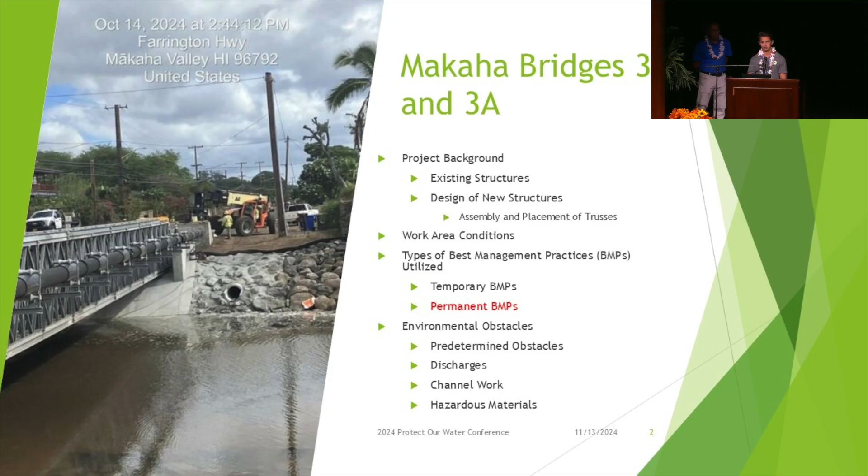Aloha, or back in Illinois, it'd be hello. So

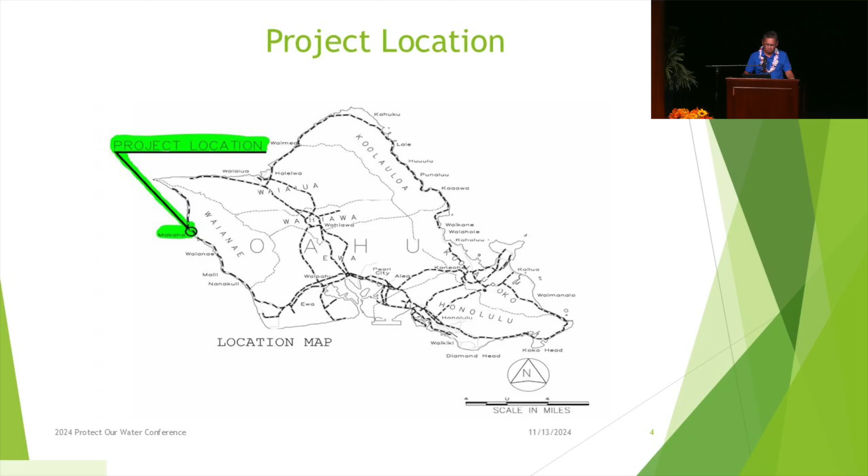The location of the project is on the very far west end of Oahu in Makaha, and it's like the furthest outpost of the island. It's pretty nice. The scenery is great. And I would like to show you a video of the project from an aerial point of view. As you can see, we're heading towards Kaena Point. And the first bridge below right there is Bridge 3. And we're heading north. And then to the right is Kili Drive.

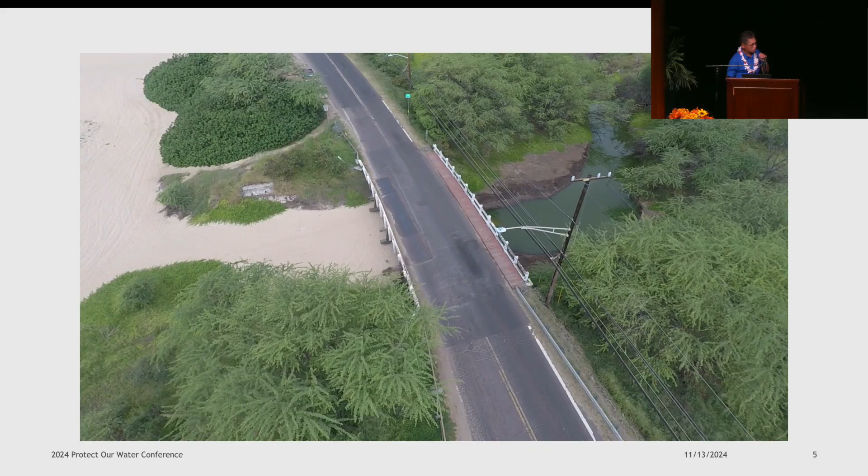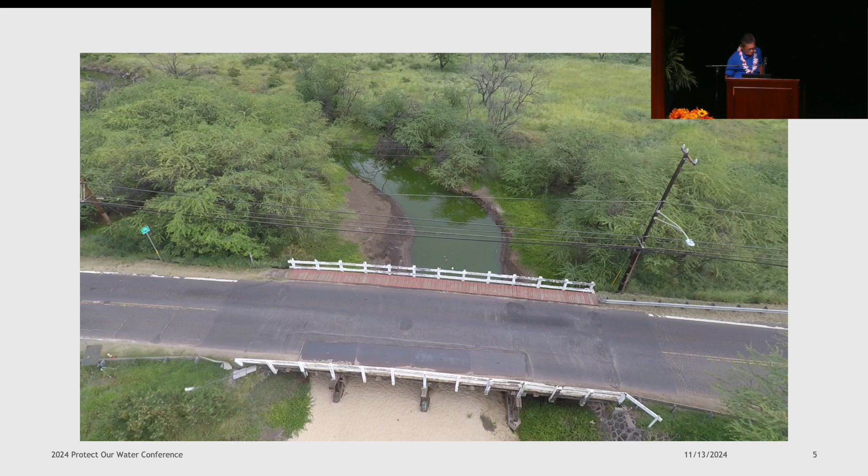And then as we move forward, you can see Bridge 3A up there. And probably another 500 feet past that is the limits of the project. And I think the drone will go down and show you the cross section. As you can see, these are relatively old bridges. Everything's made out of wood.

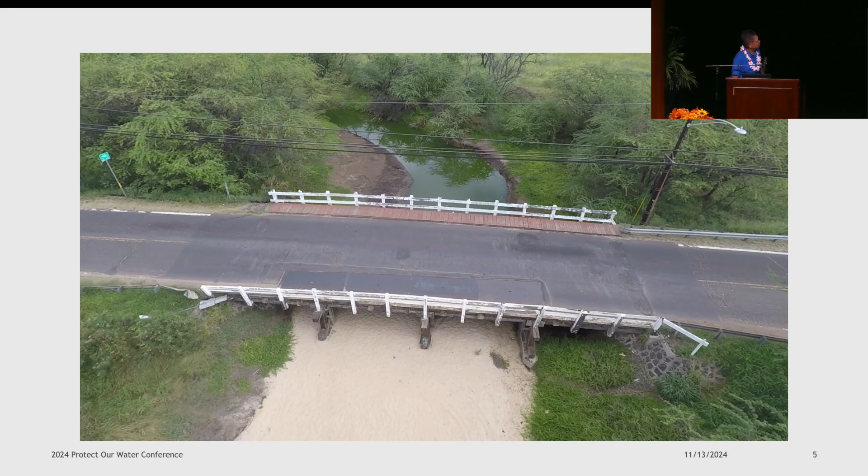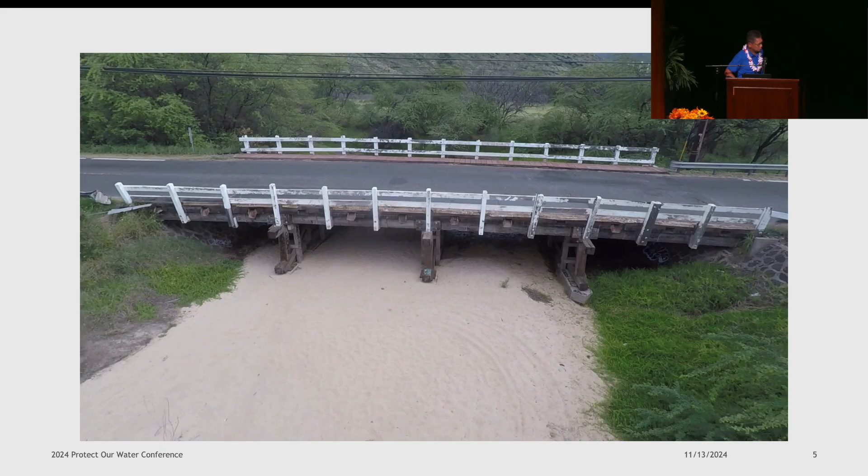Okay, just want a little brief background on the bridges. Bridge 3 has 3 spans. Bridge 3A has 4. And the superstructure is comprised of wood plank deck on wood beams. And the substructure is composed of concrete abutments and wood cap and columns for the piers.

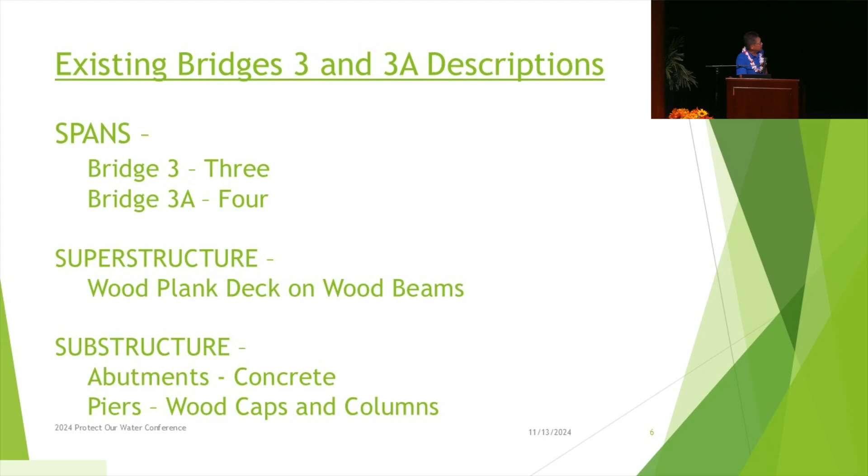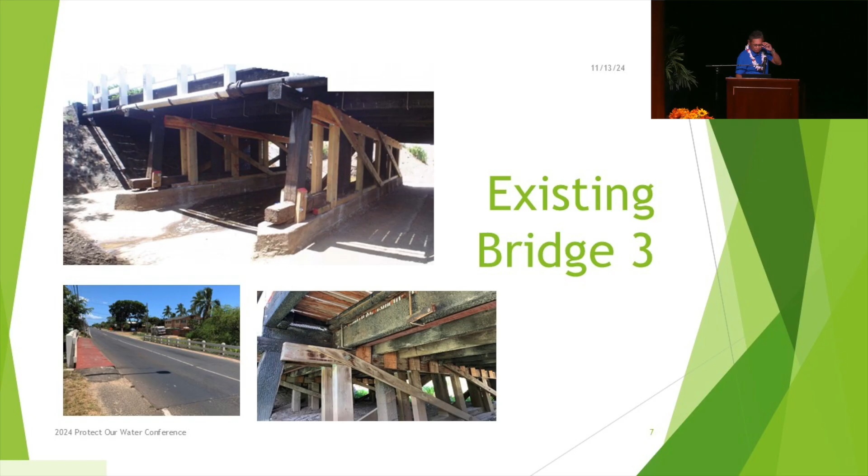So moving on, you could see that we had to strengthen the piers below so we could take traffic. Same thing with Bridge 3A.

Now the new design is on a similar alignment, but this time we're going to use a prefabricated truss, and there'll be a single span, about 100 feet for Bridge 3 and 130 feet for Bridge 3A. And the improvements: it'll be able to carry any type of current live load, and have a hydraulic opening wide enough so when the storm hits, the water won't back up, and then it'll provide shoulders and a walkway.

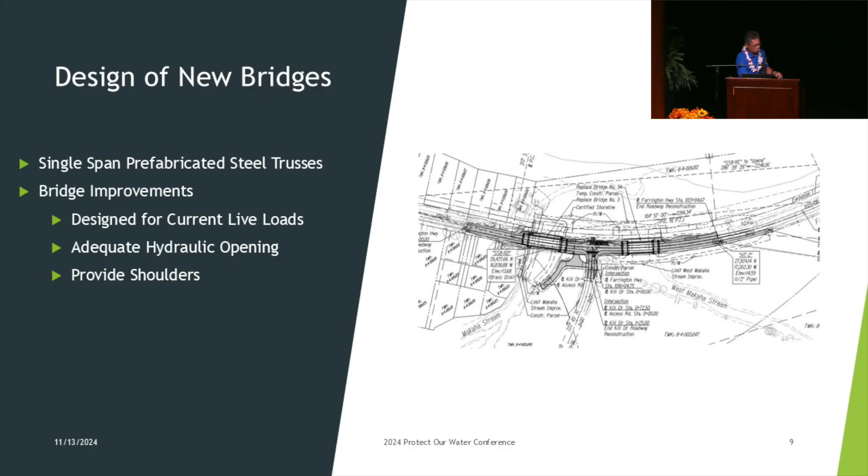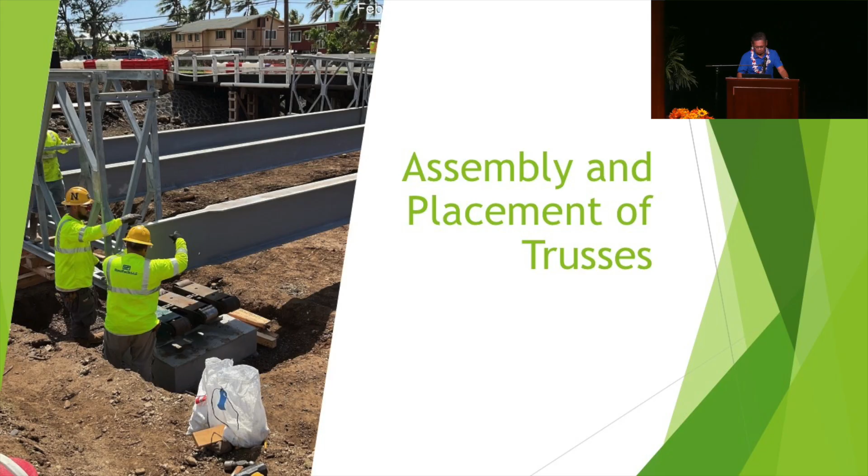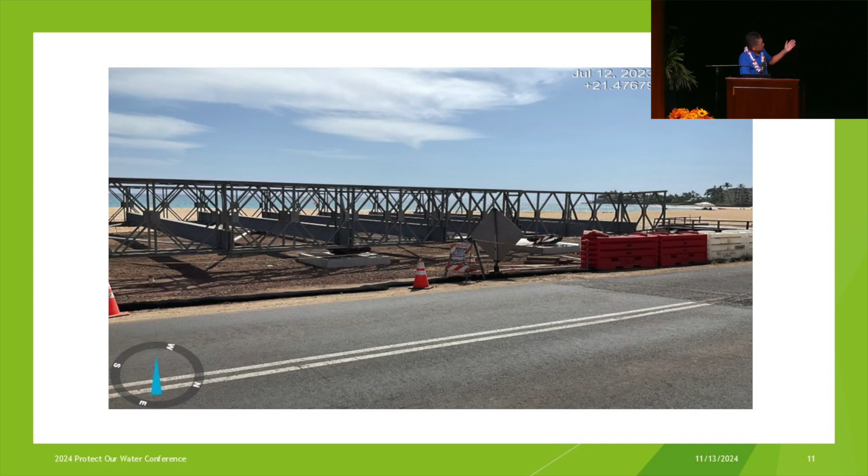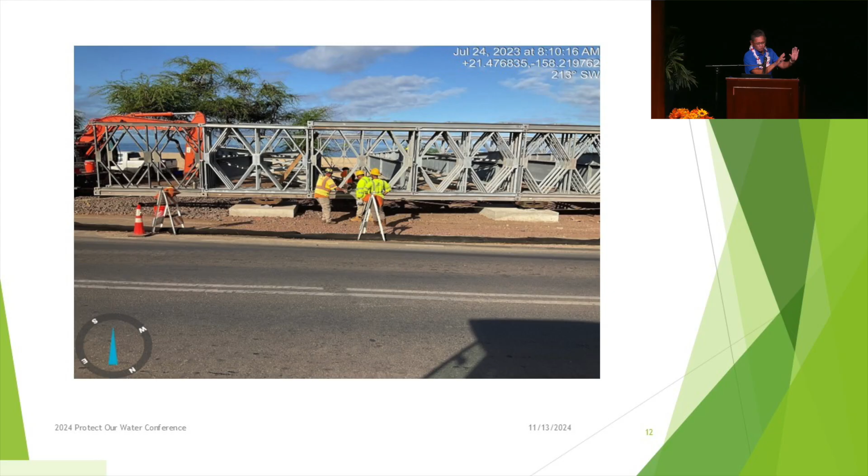So this is a picture of them assembling the bridge. This is a picture of the backhoe, and if you look underneath the concrete areas, there are rollers there, and so the truss is pushed across. And then finally we push it across, and the truss is sitting at its temporary location.

And so for both bridges, we had a 3-day weekend to do all the work. Bridge 3A, we had to close the traffic, and we had to provide access for the community north. And so they had to take shuttles to the bridge, walk across the bridge, and then go to their car. And so beginning at 8 a.m. Friday, we demolished the existing bridge. And then the portion of the truss had its deck on there to allow the vehicles to cross while we were working on the bridge.

And then once it was demolished and it was ready on Sunday at 8 o'clock, traffic was then closed again, and the bridge was placed in its permanent location. And after 11 o'clock, traffic was reopened for emergency vehicles only, and the pedestrians were allowed to cross.

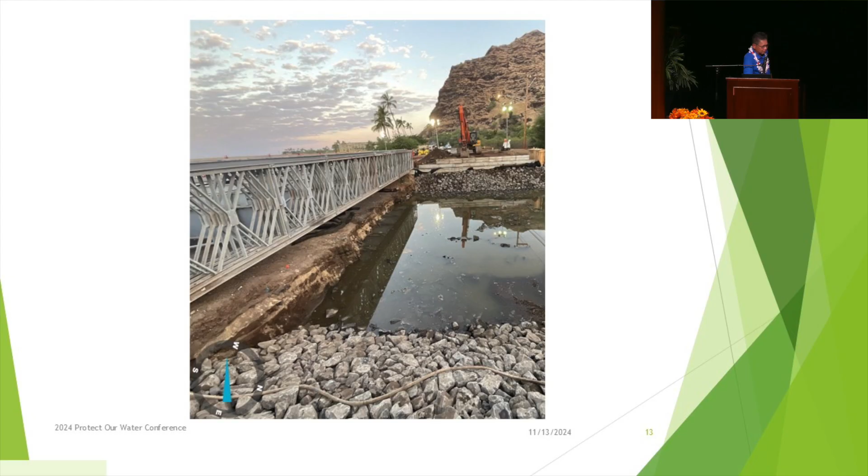Okay, real quickly, this is a picture of what the bridge looked like after. If you look on the left, the bridge was slid across, and you can see the temporary lane there for the vehicles, emergency vehicles, while the contractor built the other half of the bridge. And then they were supposed to be done by 8, and they had little problems, but we were able to open it by 10 o'clock that evening.

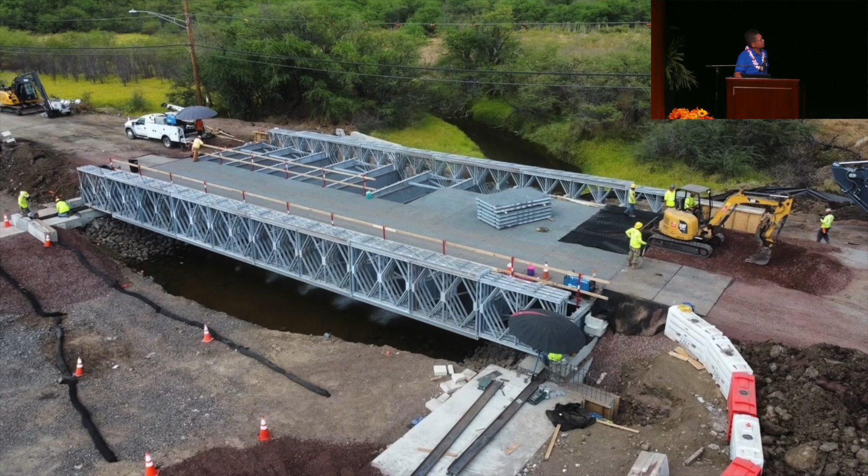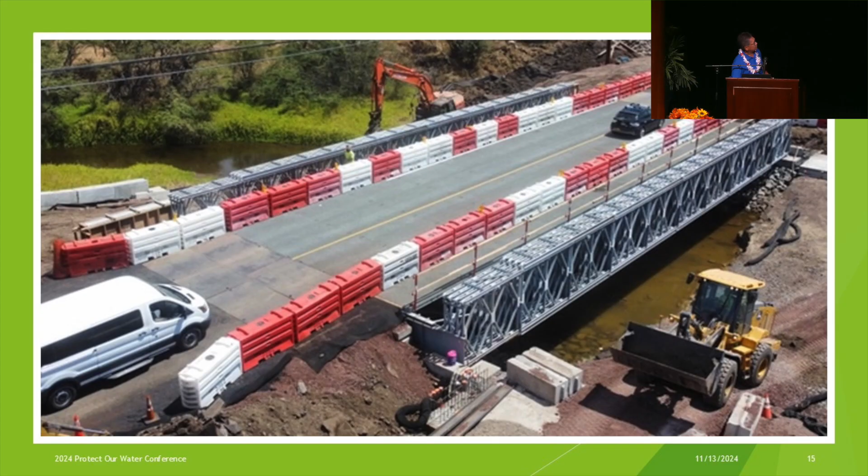And this is what it looked like on Monday morning. As you notice, we had to keep temporary barriers on there because the zone guard barrier on the bridge was not on there yet, so we had to provide some kind of a barrier. So with that, I'm going to have Cord talk about the work area conditions.

Okay, thank you, Ben. So if there are any other questions about the assembly and the structure type of the bridges, there will be time at the end of the presentation to ask that. But now we're going to be getting into BMPs and work area conditions.

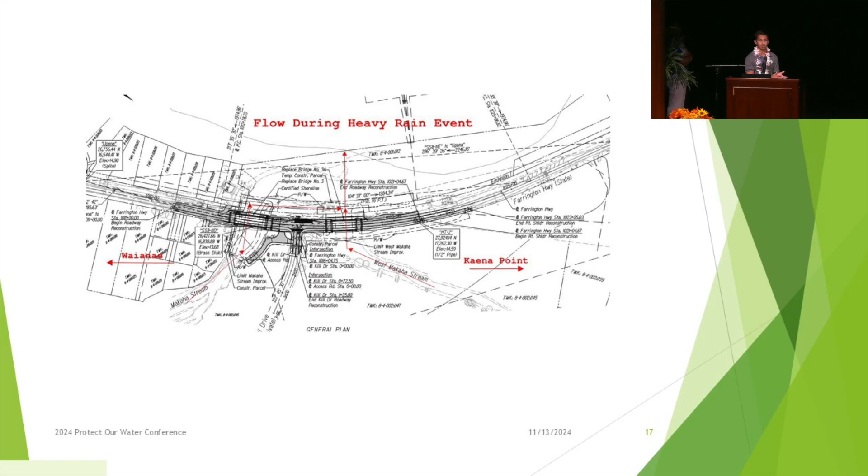So this is what typically will happen during a rain event, and just wanted to show you some pictures of this. So this is kind of the conditions that we had to deal with throughout the project when a heavy rain event occurred, or if there were high surf levels. You can see that the water level almost reached the bottom of the bridge deck, and the water level is very high. It's hard to work in these types of conditions, but that is why we formulate and create SWPPP plans to address this and account for these types of events.

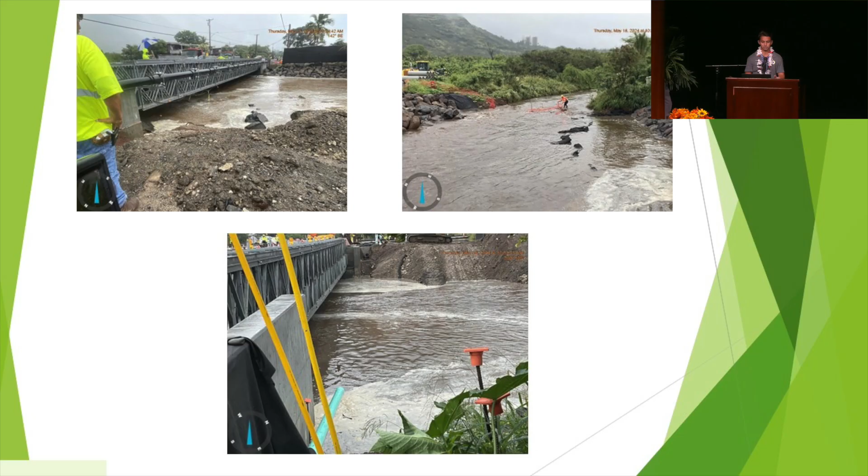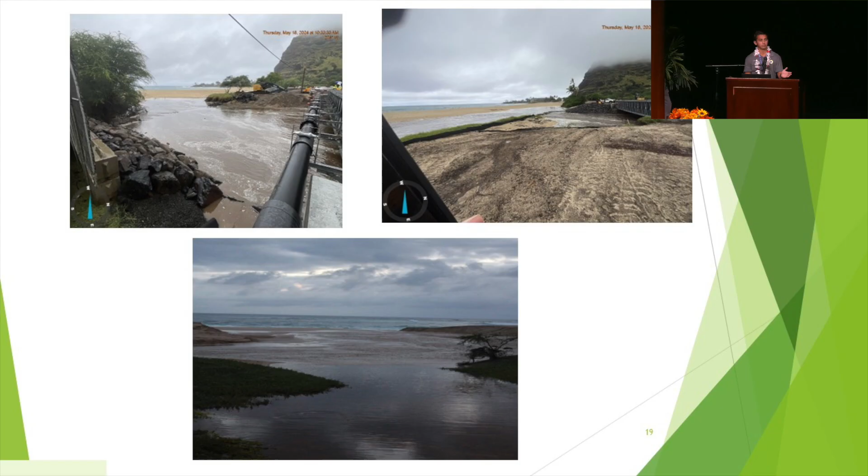And moreover, there's some more pictures. So that was on the mauka side, and now we're going to go take a look at some pictures of the makai side, where it'll run through the bridges, around the streams, and out towards the beach. So now that we've seen some pictures, we're going to go over some types of BMPs that we utilize to combat this and to protect the water, as it is the theme of this conference here today.

So the first BMP I wanted to go over is perimeter control. And there are three main types of perimeter control that were utilized on this project. The first is compost filter sock, and the second is silt fence. I'm going to go over the third in the next slide.

But those are the two main ones. And as you can see on the slide here, there are cuts from the field manual of typical BMPs for filter sock and also silt fence. For biosocks, the main purpose is to reduce flow velocity and to retain sediment and other pollutants that run through the biosock. Similarly, for silt fence, it is stakes with permeable fabric wrapped around it, and the purpose is to intercept and slow the stormwater that has sediment in it.

Now, one of the challenges we had at the Makaha project was that Makaha beach, right next to the project area, was very heavily frequented by beachgoers and the population. We would go home on a weekend, it's a very busy weekend, and a lot of the BMPs would be run over. Specifically, a lot of biosocks would get run over, and silt fence would be ripped down.

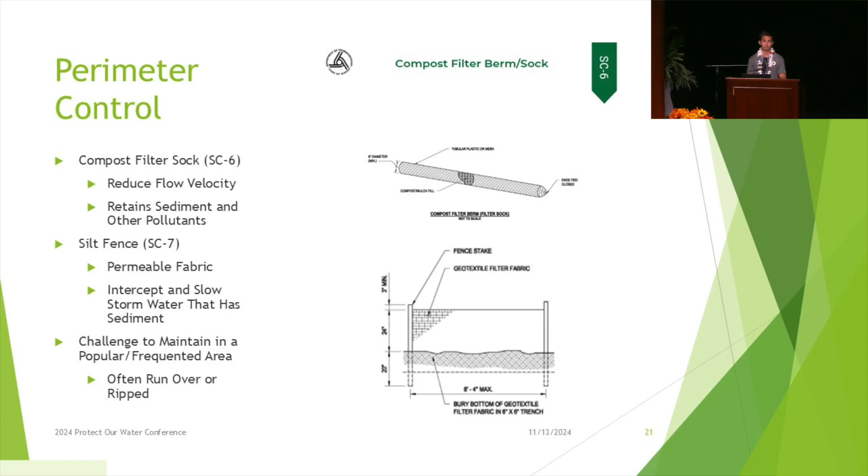And moreover, you can see there are pictures here. The main goal for the silt fence was to wrap the entire project perimeter with silt fence, and for the biosock, to line it along the streams and along the embankments. As you can see in this picture on the right, we lined it along the top of the embankment so that when water went through it, it'll reduce the flow velocity and also capture sediment before it goes down the sloped embankment. So that was the main goal, to have biosock along embankments and along the streams, and silt fence along the entire perimeter of the project.

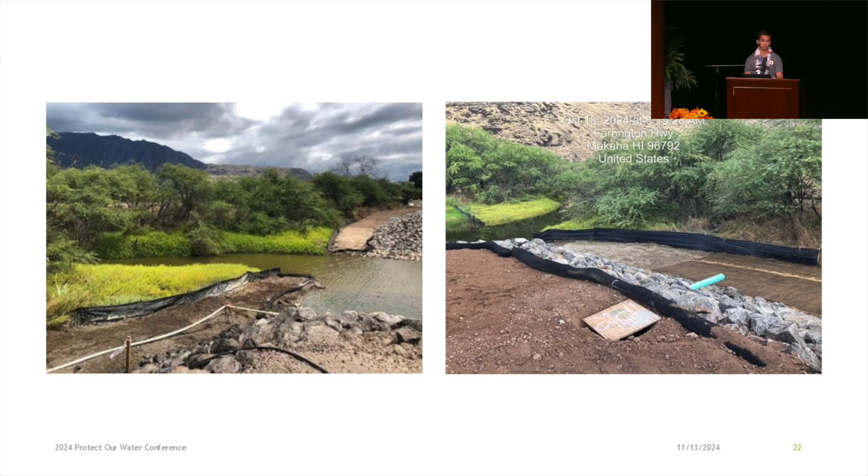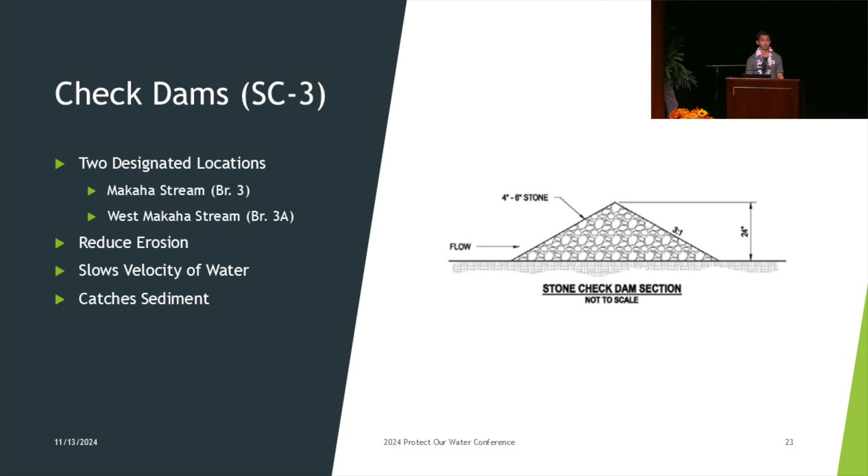Then the final form of perimeter control that we had on this project is check dams. There were two designated locations. The first one was under Bridge 3 in the Makaha stream, and the second one was the West Makaha stream under Bridge 3A. And as you can see again, there is a cut from the field manual of what a typical stone check dam looks like. On the next slide, I'll show you what it looked like for Makaha. The main purpose is, number one, to reduce erosion, number two, slow the velocity of water, and number three, similarly to the prior perimeter control, to catch sediment. These check dams were in the stream. So as you can see on the right, you have the check dam for Bridge 3, and on the left for Bridge 3A.

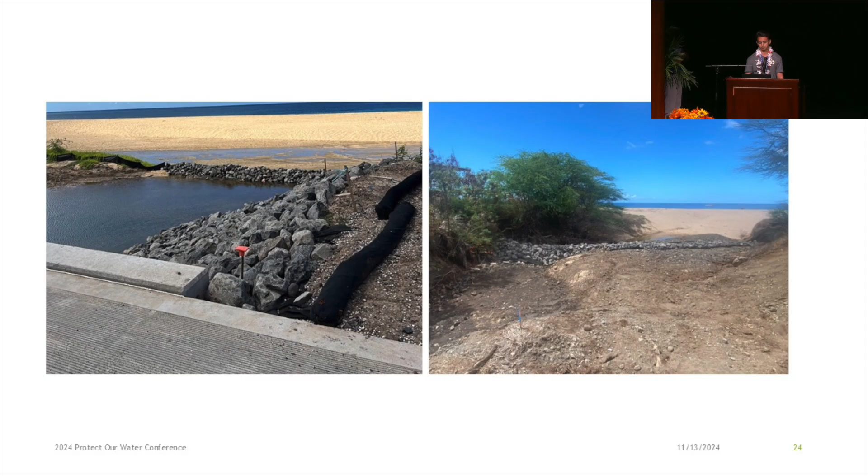Moving on, we have stockpiles. This is a typical BMP for most projects. If you're going to store material on the project site, you are going to need to cover it and surround it with perimeter control. This is of the utmost importance when you are near bodies of water, and we are near the ocean and also two streams. So we had to make sure that all the various material used on the Makaha project was properly covered and surrounded by perimeter control, because this reduces the potential for air and water pollution. If you have very fine aggregate stored in a stockpile and it's not covered, the wind can take it away, heavy rain can wash it, and if it goes into the water, that's not a good thing, right? The theme of this presentation: protect our water, keep it clean.

So Makaha had various amounts of different work. There was asphalt work when building Farrington Highway, Kili Drive, and the temporary access road. There was also a lot of aggregate work with the embankments and the channel work underneath the bridges. Additionally, there was concrete work with the abutments, the channel slabs, and the slope walls. All of that concrete work required rebar, so we had to rack and cover rebar as well when it came to material storage. I wanted to emphasize this because this is a BMP that can be utilized across all projects, especially if you're near bodies of water.

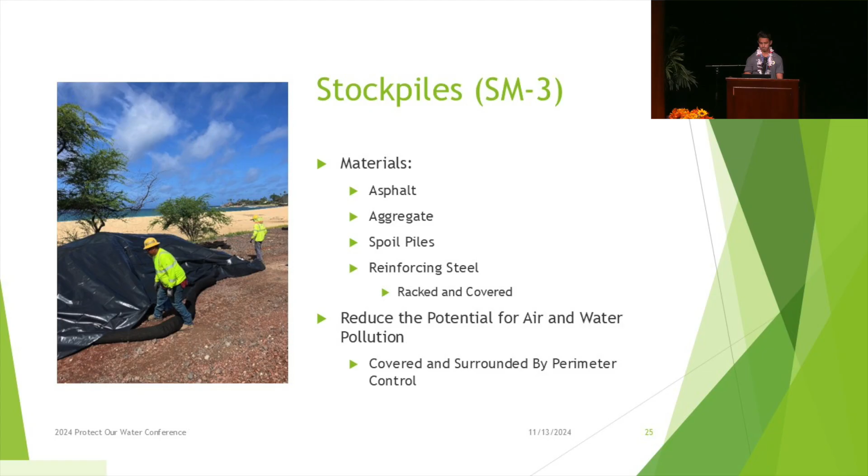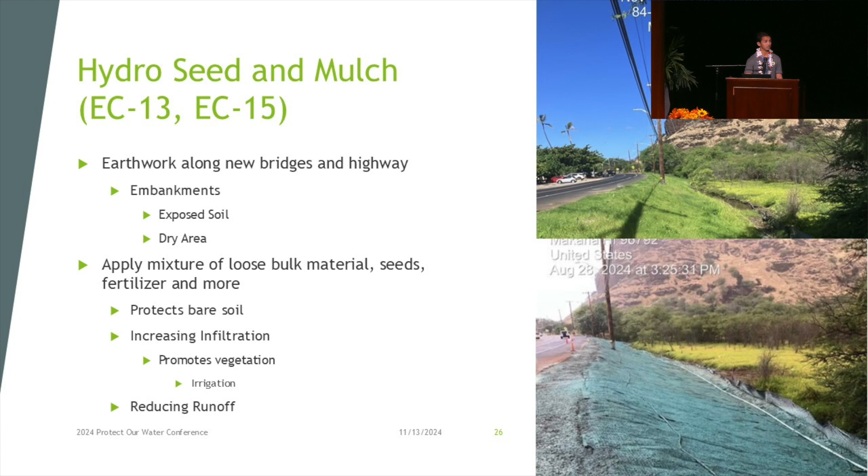throughout the day. And the main purpose of hydroseeding is to protect bare soil, to protect the exposed soil, and to increase infiltration, especially when the soil is exposed. And if you look at the top picture, this is what the embankment looks like now. It has a lot of vegetation. It looks green. It almost looks better than before construction started, right? So that's the goal. So yeah, that's hydroseeding, and this can be utilized, again, on various different projects across the state.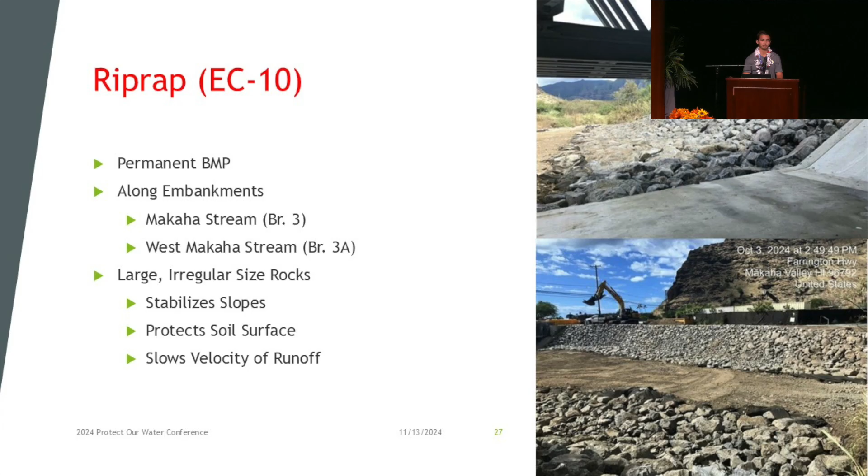And as you can see in the pictures that I showed earlier, when there's heavy rain, the rain will come down the embankments. And the point of this riprap is to reduce the velocity of that and also to catch any sediment that may come along with it. But the main point is during heavy rain events, water is gushing through these streams, especially Bridge 3, because if you take a look at some of the pictures, Bridge 3A over our West Makaha Stream kind of acts more like a lake where the water is a little bit more stagnant, but under Bridge 3, water gushes and flows through that stream. So that's going to be getting into my next BMP. But the first permanent BMP is riprap.

And the second one is the channel slab. So on the side here, you can see there is a cut of riprap from the field manual. But in this case, under Bridge 3, since there is so much water flowing during heavy rain events and high surf, HDOT ultimately decided to install a channel slab and slope wall. And what this does is it essentially mimics riprap, but at the same time, it has better erosion protection and prevents bridge scour. And it essentially has the same purpose, so it'll protect from erosion, it protects the soil surface, and it also stabilizes the slope along the embankments of the bridge. And this one is directly underneath Bridge 3. So as you can see, there's pictures here.

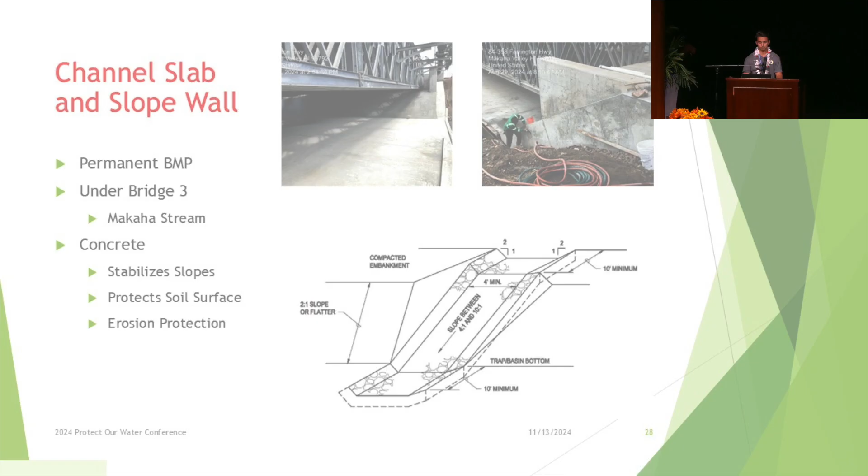And next, we're going to talk about the environmental obstacles that we had to go through for Makaha. So I'm going to hand it back to Ben.

One of the requirements for this project was to provide biological monitoring and archaeological monitoring. The biologists worked daily from 6:45 to 12:15, and they were required to be there every working day. This project had numerous endangered species: the Hawaiian bat, Hawaiian stilt, the honu, and the Hawaiian monk seal. I think we only saw maybe a couple honus and a monk seal, but overall there wasn't any problem. An archaeologist was present during any excavation, and nothing was unearthed during this project, but they did find a gun and a wallet, and so that was very interesting.

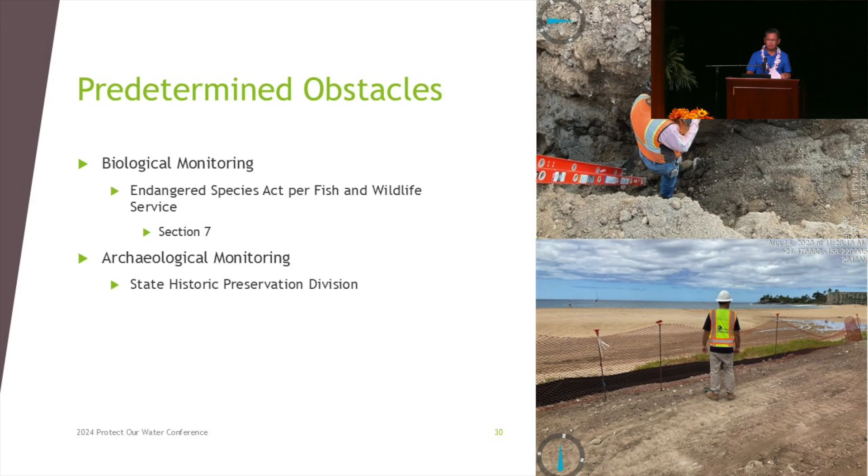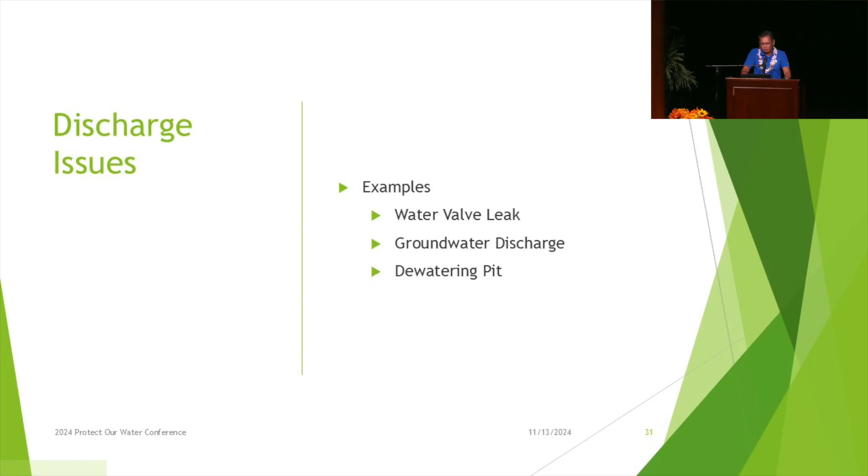Moving on, you always hope that your project will run smoothly and cleanly and you don't have to worry about having to follow up on reports or anything, but as usual, not all projects are that way. And we had our share. We had discharge issues regarding a water valve leak, groundwater discharge, and dewatering pits. This is the first discharge. It occurred in December of 2022. As you could see, this was March of '23.

If you could notice, we had to excavate for a water line, and in order to excavate, we had to dewater the excavation, so there was a pump installed, and the pump brought the hose all the way out to a grassy area where the water would go into the earth. And that was done for a long time because it took a while to excavate. But anyway, what happened was the area got inundated, too much water, and the water didn't have anywhere to go, so it ended up, at the last arrow, going into Makaha Stream.

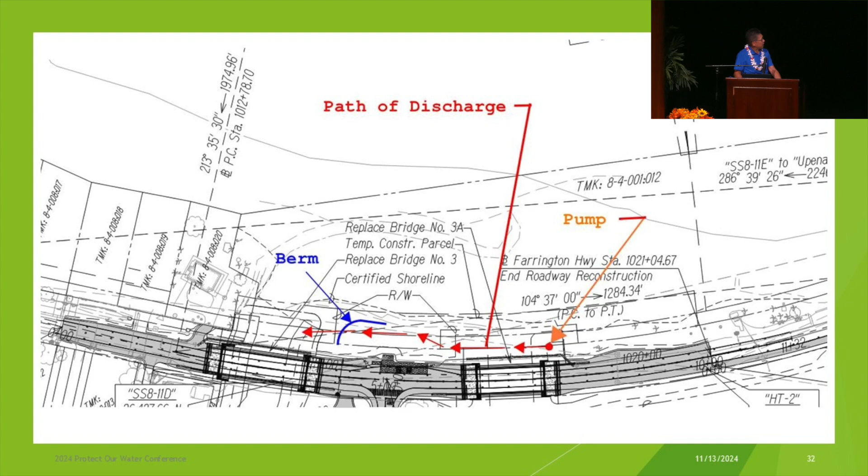So at that point, the project excavation was stopped. We installed biosocks to help stop the leakage, and then the contractor got together with his designer, and they decided to put in an earth embankment dam that's about 2 feet high. So here's the picture. This is where they're excavating. As you can see, the hose and the pump, and then it's taking it out through the hoses into the ground. And then this is the area after the inundation, when the water started going into Makaha Stream.

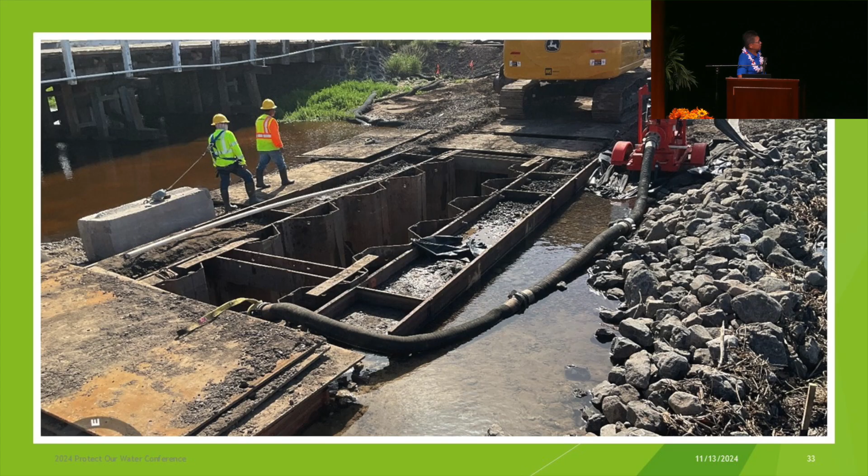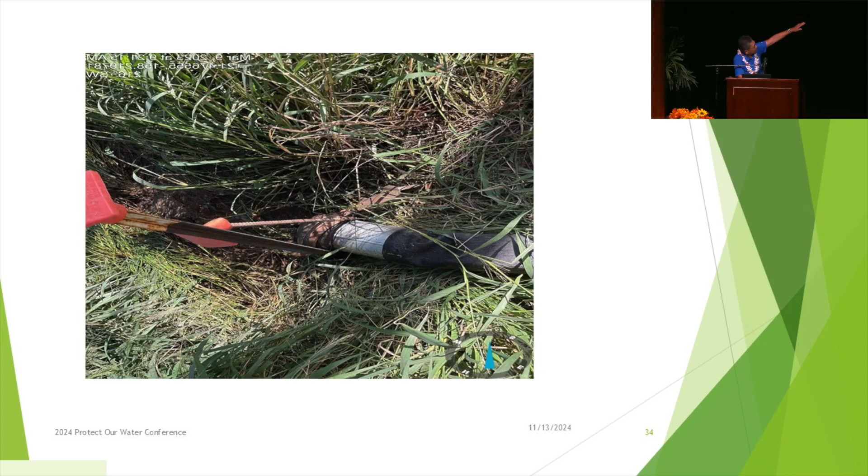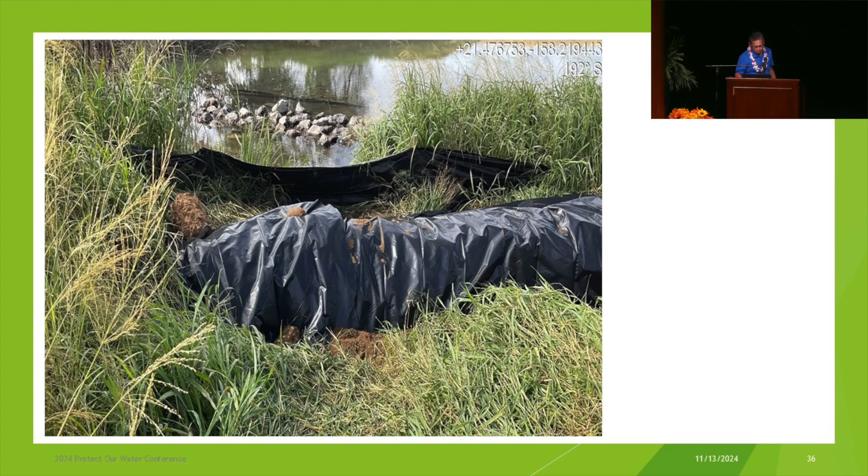So on the other side of the silt fence, that's where the area was. We ended up putting biosocks right away, stopping the project. And in the meantime, they decided to put this earth embankment. As you could see, it went around the whole area, and it was monitored daily by the contractor to make sure that there was no overflow.

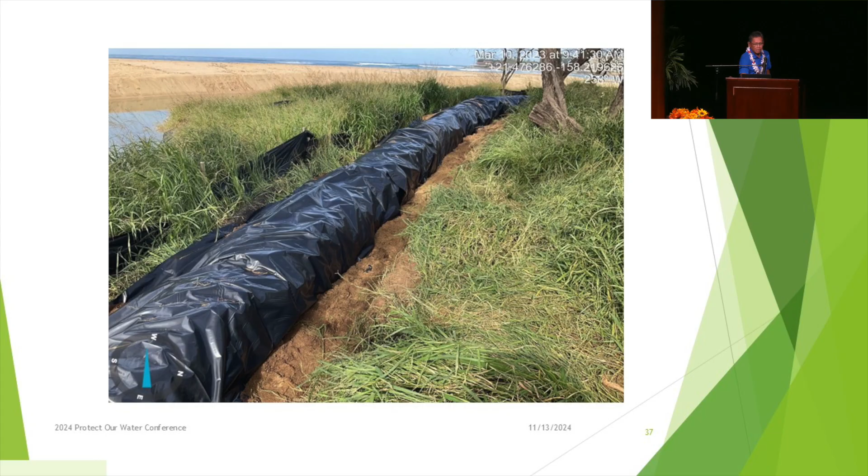Moving on to SWPPP, this project had a lot of phases, so it required a lot of amendments, 30 in all. What we would do, we would start, and then every time there was a different work stage, we would do the amendment for the SWPPP and so forth. This one's an example of SWPPP 19. This is the part where we had the discharge, and we ended up updating the SWPPP to show that earth berm.

Some of the things that are addressed up there, I know it's hard to read, but here, the items we addressed in SWPPPs were our stockpiles, spoil piles, construction entries and exits, drill shaft work, assembly of the trusses, because the trusses had to be built on the side, installation of micropiles for utility poles, which was a last-minute thing, so they had to dig, and we had to provide embankments for them to get down there.

Ramp access, so every time that we had to do stream work, we had to provide entrances into the stream. And also when we removed the bridge, they had to have access to the stream. We had water line excavation, demolition of the bridge, concrete washout areas, make sure that the concrete doesn't flow out.

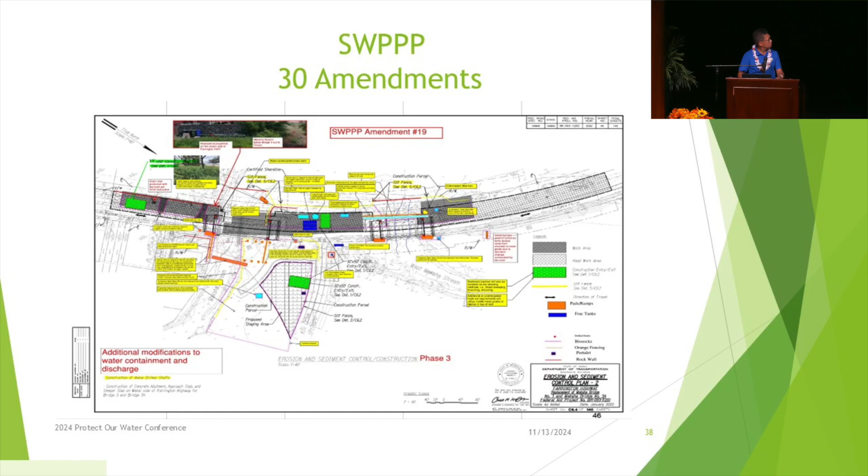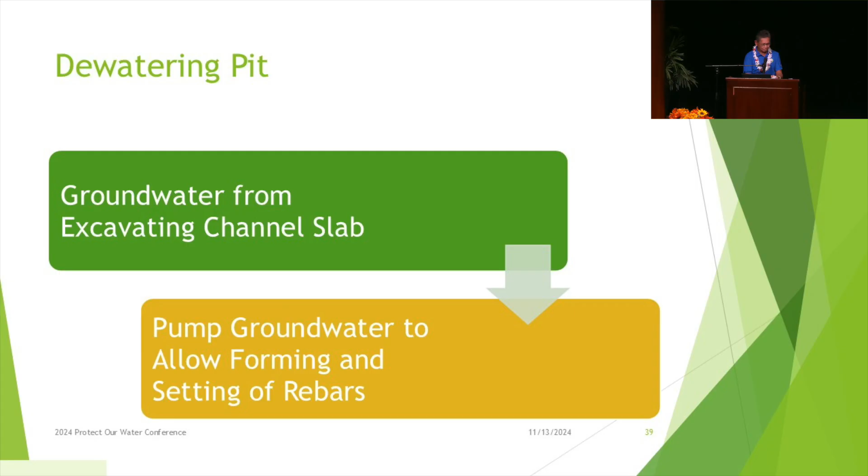Okay, the next item was a dewatering pit. What happened was we had to do a channel slab underneath, the channel slab that Cord was talking about. We had to dig for the cutoff wall. The cutoff wall is about a 1 foot by 4 foot section on both sides of the channel slab. And in order to build that, you had to excavate probably a 5 foot wide area.

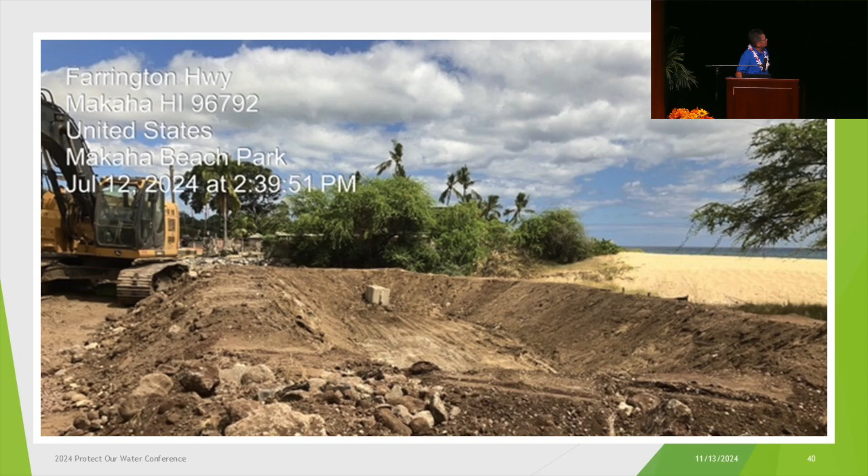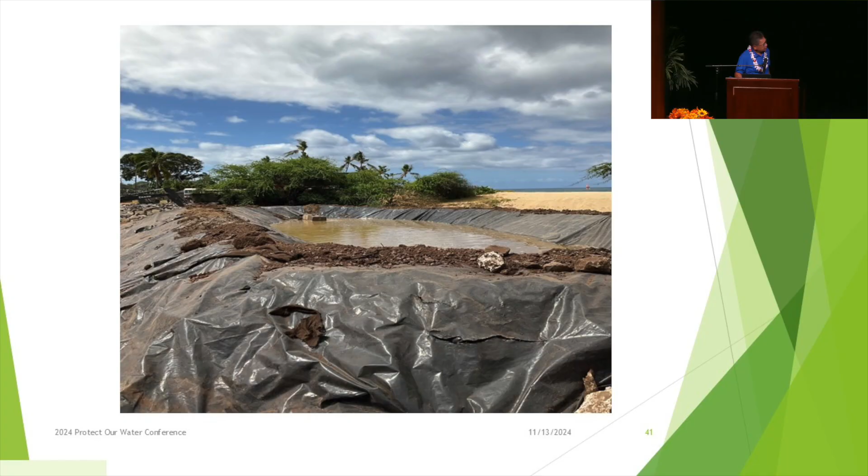And when they did that, of course, the groundwater came up. And in order for them to form, you had to get rid of the water. So GP, Great Pacific, decided to use a discharge pit to solve the problem. As you can see, the backside there, they're developing the pit. Here, they provided the liner. And this is the area where the cutoff wall is.

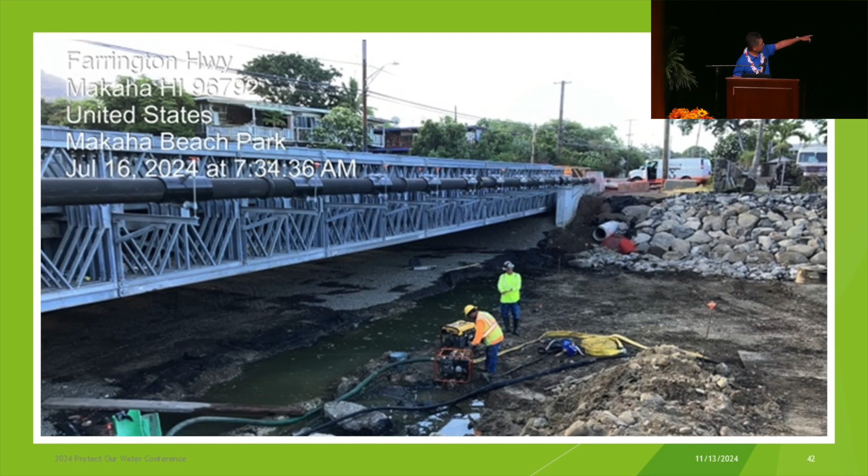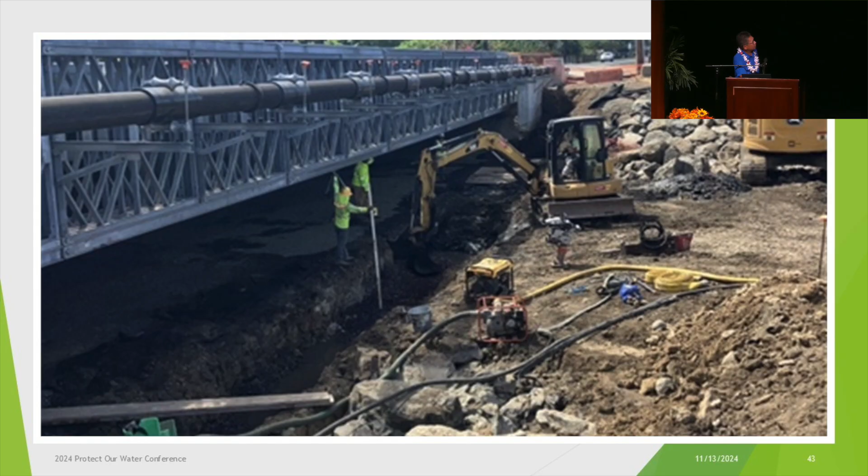If you look at the gentleman there to their left, that's a 4 foot wide or 6 foot wide hole full of water, and you can see where the hose is down there in the pump. And then after it's pumped out, the laborers were able to get in and form the concrete, the forms. And this is showing you another view of the hose going up and into the pit.

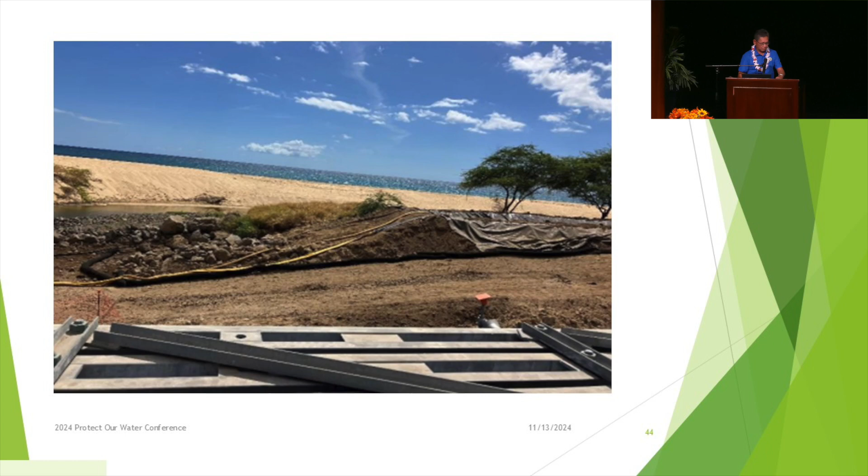Our next discharge occurred up there on Bridge 3A. My notes. Naturally occurring groundwater from the trenching for the highway, Farrington Highway on the Makaha side, north of Bridge 3A.

They were doing drill shaft work, and one of the equipment went across the road to be set aside, and they ran over a steel plate that had a valve covering over it. Well, when they ran over that, the valve cover broke and the water started running. And then next thing you know, it was flowing down next to the abutment and down into the stream. BWS was informed, and they came back, and they brought their crew to repair the valve.

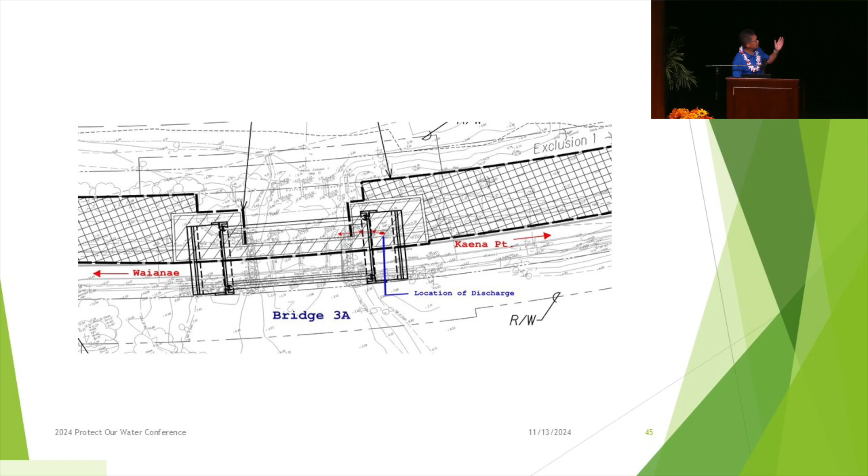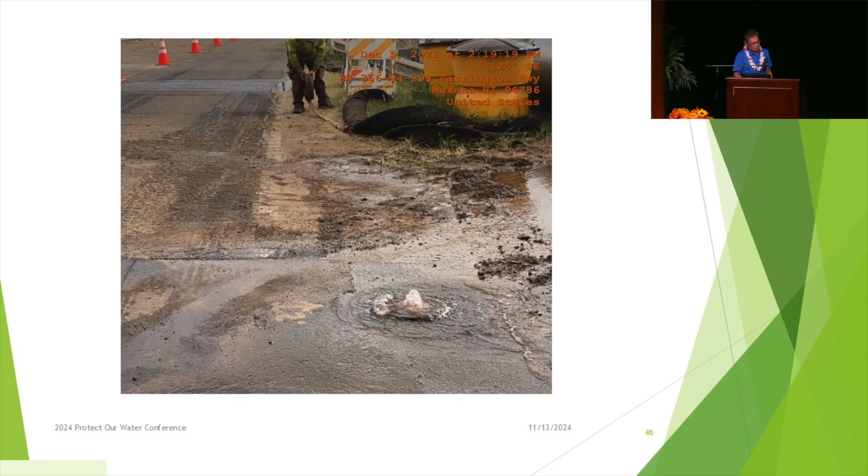But in the meantime, the water kept coming down, so we had to put biosocks. This area wasn't worked on yet, so there weren't any biosocks available at the time because it was not being used. So here's the leak. And you could see it's coming down on the side. We put biosocks trying to stop it.

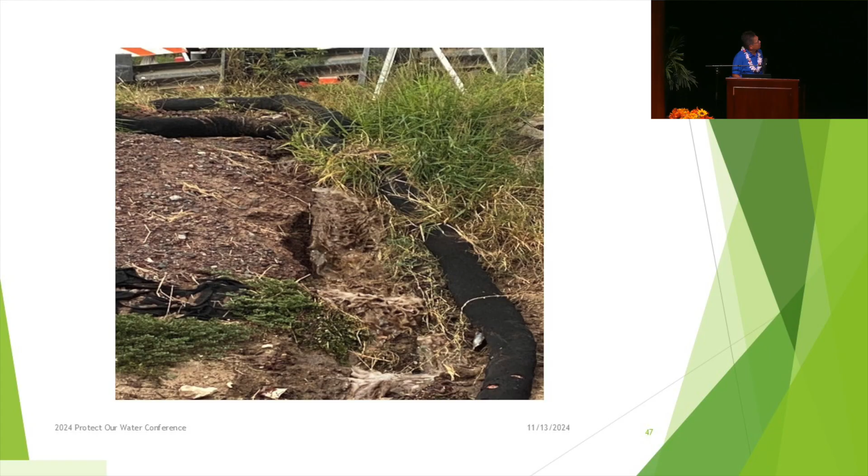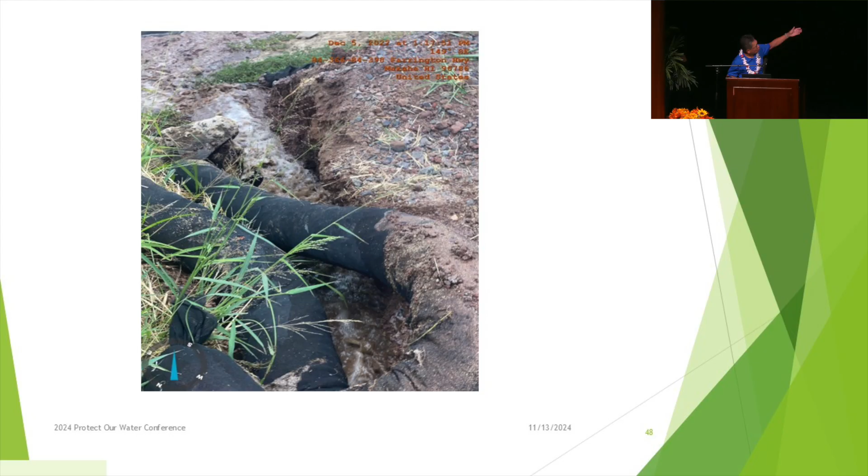There it is, reaching West Makaha Stream. And eventually, it just kept running because it took them a while to stop the leak. So in the meantime, we provided more biosocks at the stream. In particular, the biosock on the right, that was to protect water from moving towards the muliwai, which is a saltwater area pond.

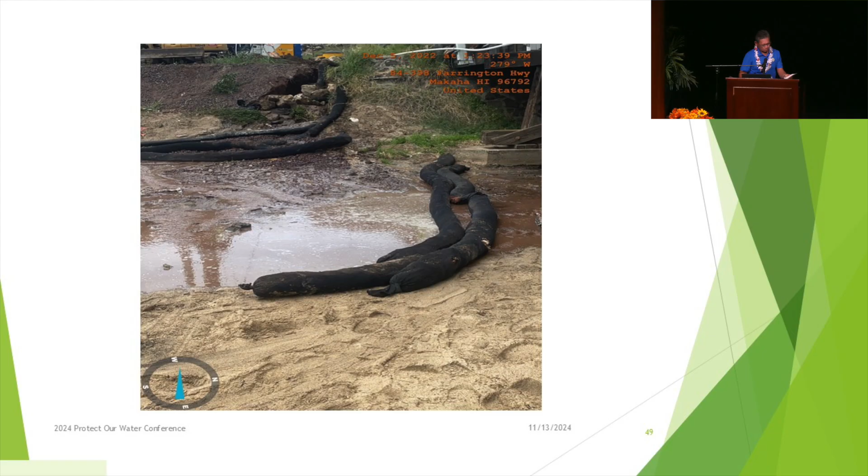And then finally, we have hazardous material. We encountered hazardous material one time. It was on the West Makaha Stream at Bridge 3A. It was an oily type substance, not related to construction work. It was the supervised environmental consultant, Inclusion, that took the lead on finding a remediation and providing a report to

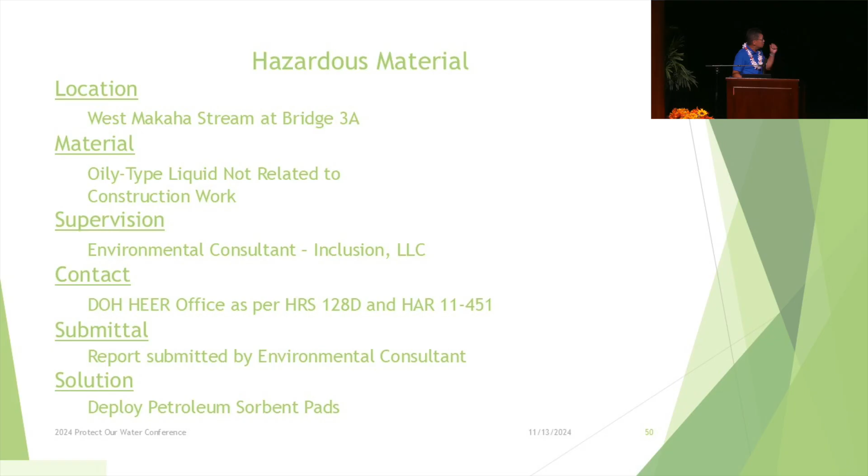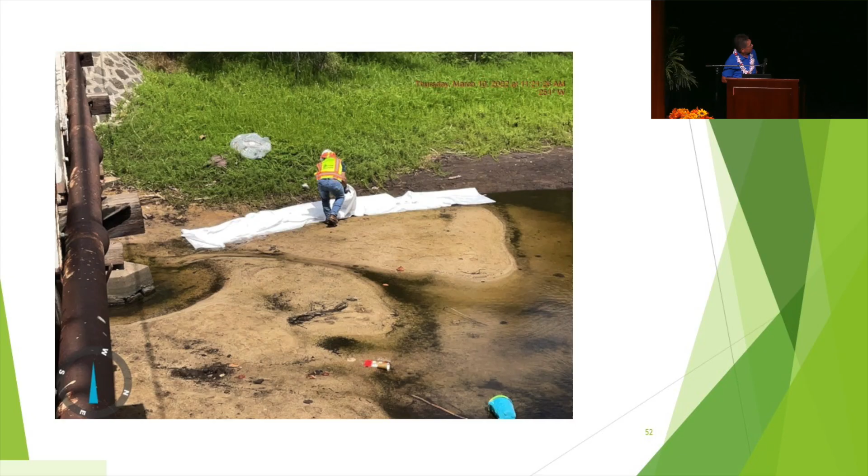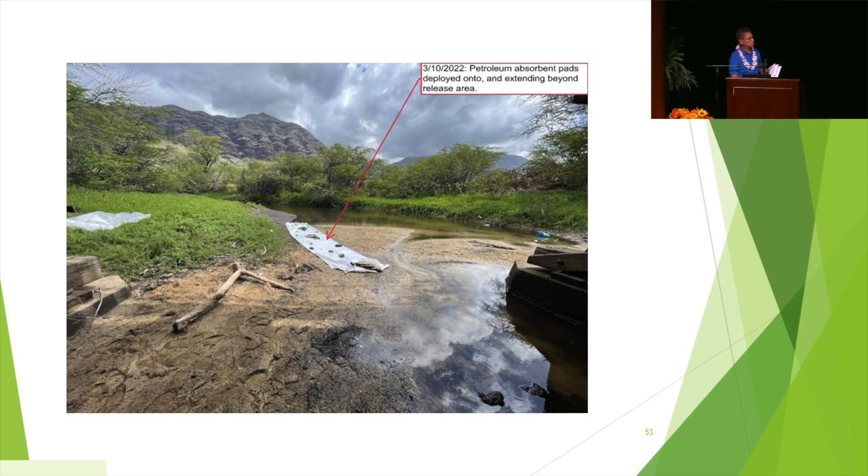He contacted me, and I contacted Inclusion. They came out after discussing with HEER, and they provided these absorbent pads. And as you could see, after that, they just put the rocks. And he came out to monitor at least 3 or 4 days to make sure everything was finished. And so there was no problem. He submitted the report to HEER, and we never heard anything back, so I assume it was okay.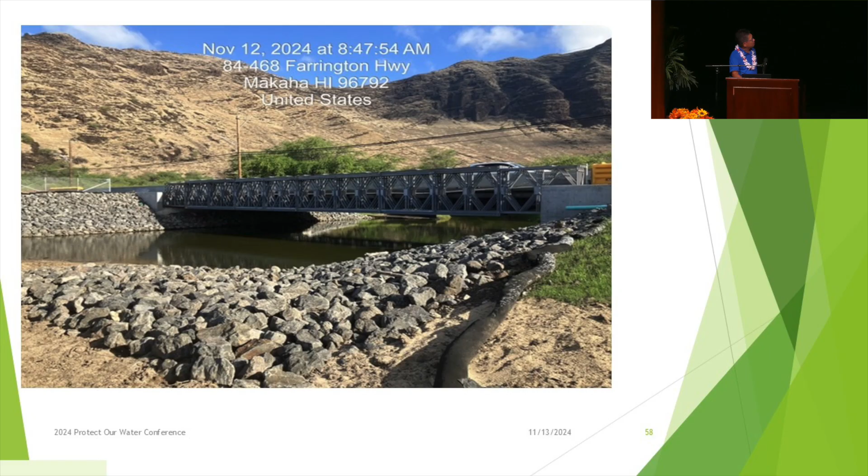Similar structure, similar cross-section. And here's what it looks like on bridge 3 looking towards Makaha. And this is bridge 3A looking towards Makaha. As you could tell the difference, this is more like a lake where you don't really have much water flowing hard. That's why there's no concrete slab. While here, there's a concrete slab because this is where the water flows from the mountain downward. So I think that's the presentation.

I'd like to just thank some people. I want to thank my crew, Danilo Cabalang, Lincoln Tejada, and Chord Medeiros, and from Bowers, Nestor Guib and Jay Stone, who did the QA/QC for the SWPPPs. And HDOT, I'd like to thank Daryl Tanabe, the current RE, Willie Rapasura, the former RE who retired, and Scott Watanabe, the lead inspector, and third-party inspectors, Claudia Ackroyd and Angie McAdingding. Thank you for keeping us on our toes. And for Grace Pacific, Eric Hansen, Scott Peterson, and Zach Alcos. Last but not least, I want to thank Kai Kraut, the owner, who lured me out of retirement to work on this great project. Thank you.